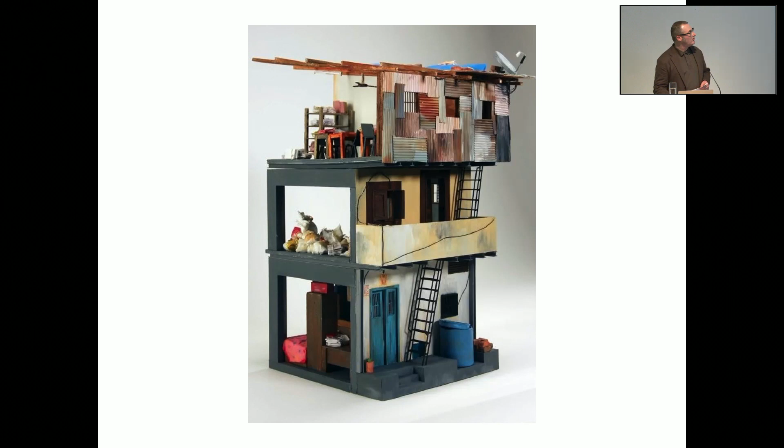So I'm going to talk about an idea behind the course, an idea that we try to impart to the students, which is the idea that all buildings have value, as do all people.

So while in practice, I almost exclusively worked on existing buildings. I came from Canada in 1996 and started working in the UK. And I think coming from a country which really has no historic built fabric at all, and what it does have, it doesn't tend to respect very well - it was really special for me to work in existing buildings.

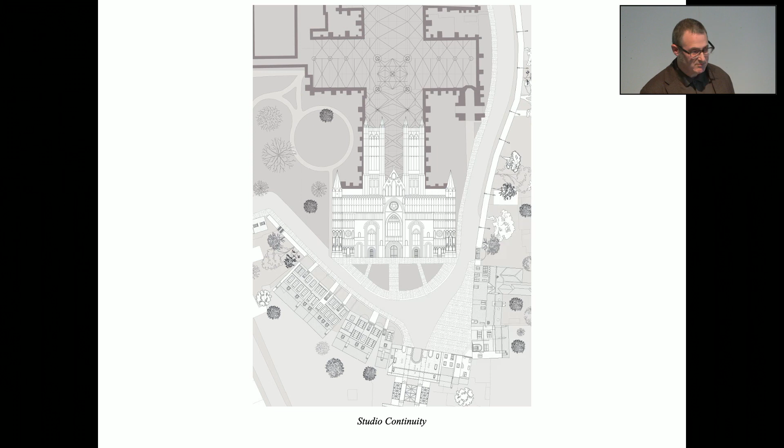Studio Continuity proposes a methodology, which I call looking at oldness, a methodology for working in existing buildings with understanding and appreciation in order to maximize their poetic potential.

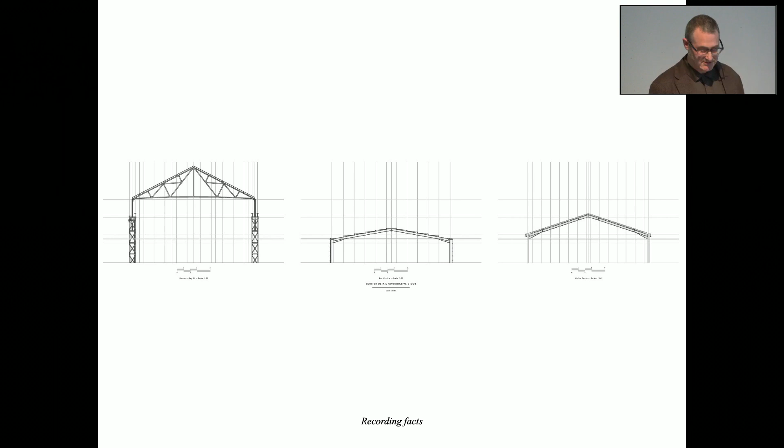The first step is recording facts. It's about documenting without preconceived notions. Judgment is suspended. It's about observation.

The second step I call seeing history. It's about understanding the cultural context that has shaped the original building and subsequent changes. Understanding what the architect or the owner, the builder, all the different contributors thought, and why things happened the way that they did.

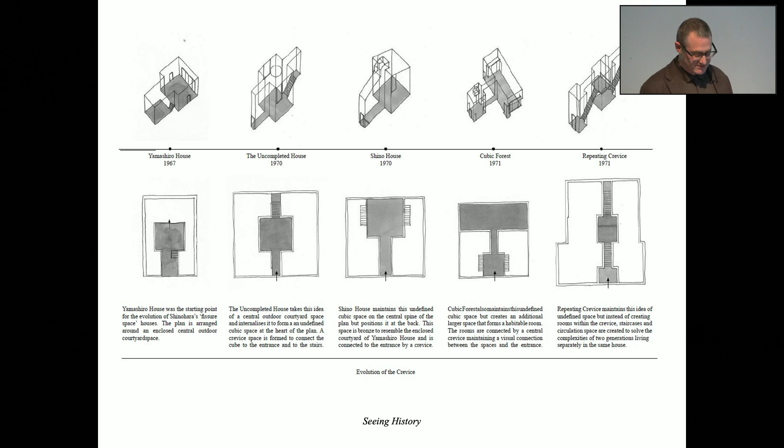The third step is conveying emotion. This is about expressing and documenting the emotional content in the existing building. This is the most important of all three steps. I think when you work on an existing building, you want to work with and enhance, in particular, the emotional qualities of a building.

Then I call it the assessment of significance. Of course, it's not an assessment of significance like in conservation, but it's about drawing up a set of design priorities. It's about making judgments and coming to conclusions - comparing, contrasting, analyzing and synthesizing the three previous steps. Then, so that when you move forward, you do so with a sense of - this morning people talked about how important it is to understand and appreciate what's there to shape those kinds of decisions that you need to make.

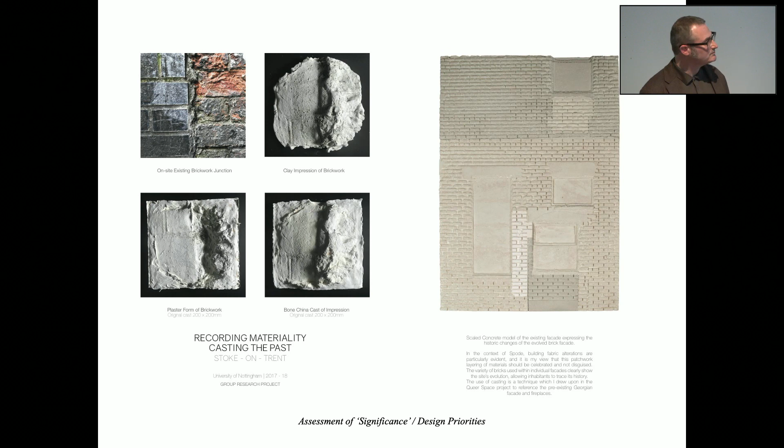So I'm going to show you some examples of some, very quickly, different student projects.

So when you see all buildings as having value, and you see buildings as a resource, then the first step is to keep everything unless there is a good reason not to - a kind of a near zero demolition approach. Stephen was talking about that in the discussion this morning.

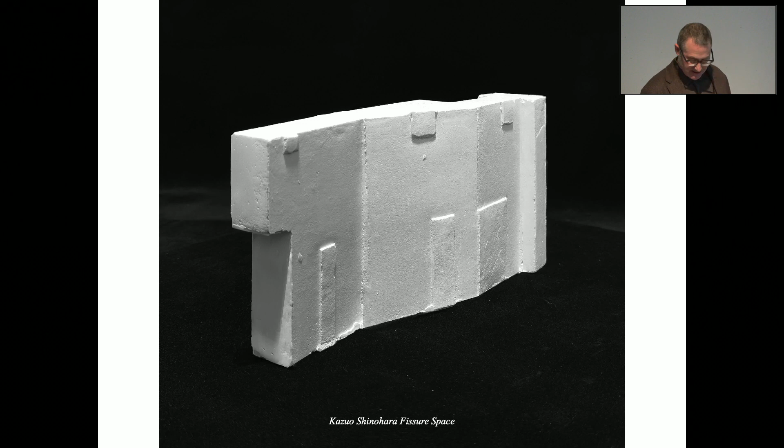So what do we got here? This is a study we did of Kazuo Shinohara during lockdown. So we went to Japan virtually - that was really fun. We had a friend of mine there, and he took us on a tour of one of the Shinohara houses, like on his phone. It was almost as good as being there, but it was a good thing to do during lockdown.

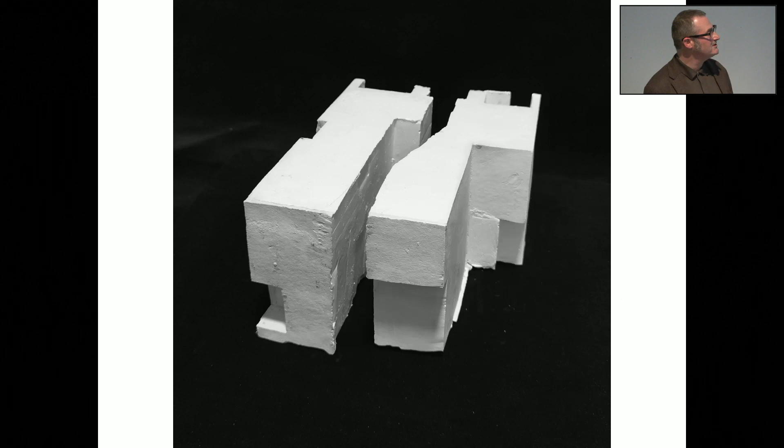And it meant I could take my studio globally, because obviously if your studio is really about visiting buildings, you're kind of limited how far you can take people. So this is a plaster model of the Shinohara fissure space as a solid, and then as a void.

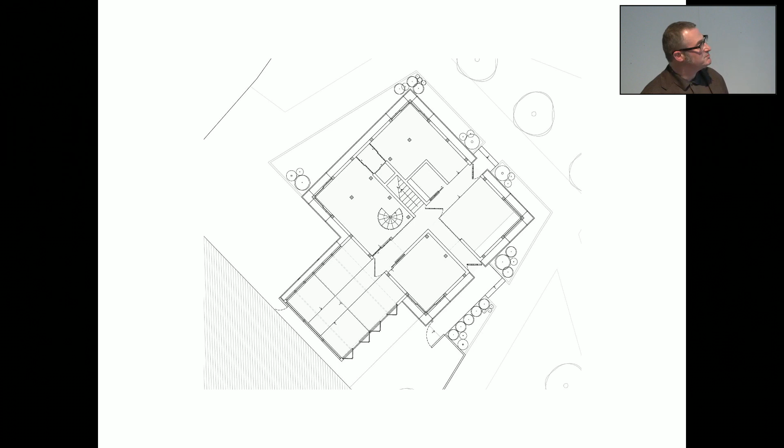Then they translated the ideas from Japan to a UK context. So this is the Eagle Building in Nottingham, which is now demolished. They applied the concept of fissure to the Eagle Building - that's the proposed plan and the existing plan.

Add, don't subtract - another approach, very similar. This is Burroughs Court in Sneinton, Nottingham. It's not the most beautiful building, though it has now been refurbished. Still not that beautiful.

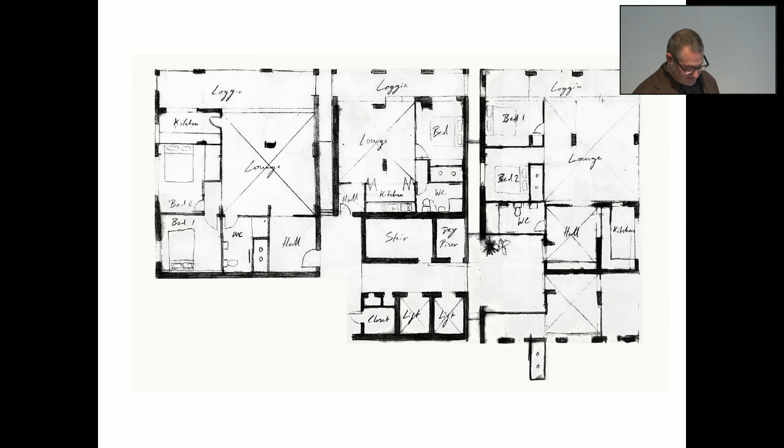And yeah, it wasn't in the best of condition. So Ryder was influenced by Peter Märkli's Apartments in Sargans, taking some of the ideas that Stephen was talking about. He was engaging with those ideas of no corridors, of making large, generous rooms and making a family of rooms. So that's the existing plan, and that's Ryder's proposal.

In order to do what he wanted to do, columns ended up in the middle of rooms. We thought this was something special, that actually a column in a room always makes different spaces within a space.

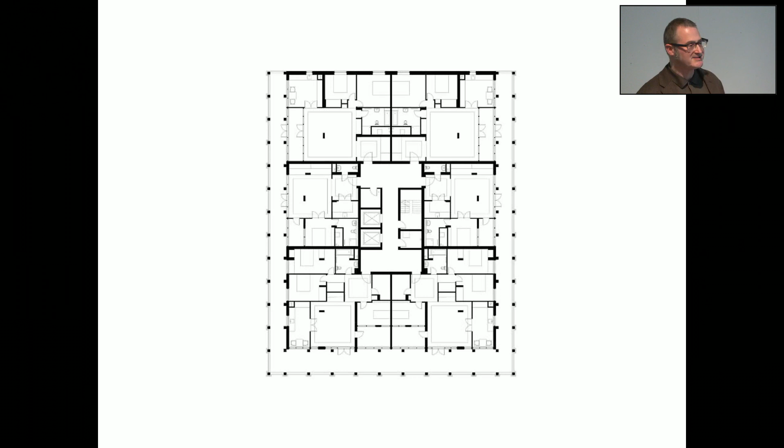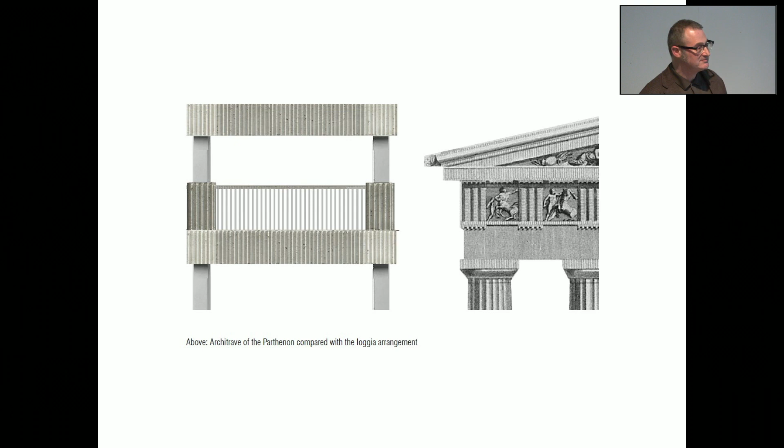And so we thought that was quite a nice thing. Yeah. So then he wrapped the building in a new facade, which pulled from the classical tradition to bring a new language to the building and unify it.

So the next idea is part 2 of the talk. All people have value. So at this point, you might expect me to speak about social justice, inclusivity, these kinds of things. But I'm not going to. I'm going to talk about the people that are connected to a building, the clients, the users, and the project team.

And in that list, I'd say the users are most important, but I'm going to probably talk more about the project team. So under the idea of the continuing life of a building, if you're having an approach that buildings have value, then they slowly change and transform through time.

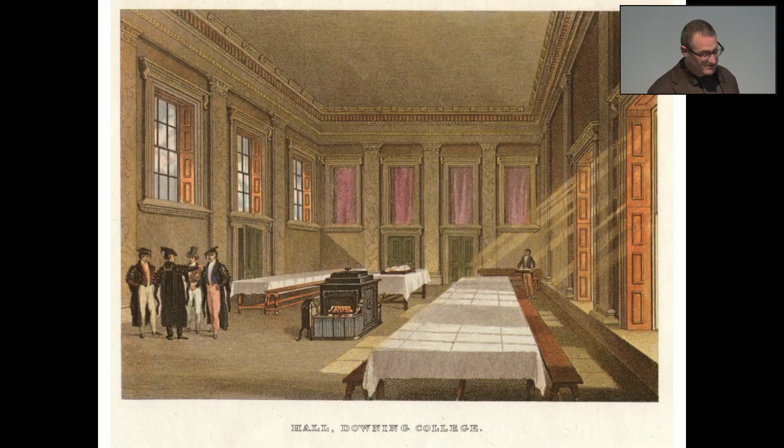So Downing College, designed and built by William Wilkins in 1821, remodeled by Barry in 1873, transformed by Howell, Killick, Partridge, and Amis in 1967, and again transformed by Caruso St. John in 2009.

By the way, I see this. I've always seen this project as a piece of theater. It's always how I've felt about it, which I guess you would classify as restoration under the kind of Ruskin thing.

Yeah, so there are many players in the life of a building, when a building has a continuing life. So architecture is not about architecture with a capital A. It's not about a single author. It's about a multiplicity of authors and participants, all who add value to the continuing life and evolving life of a building. It's a collaborative process.

And even just in one small project, there are a multitude of contributors. I don't think that's the whole list. So that's the list of clients, architect, all the consultants, contractors, subcontractors, etc.

So then taking that and translating it to a teaching framework, this idea of collaboration. We work with practice, all schools, I think, do. So working with practice, guest lecturers, guest tutors, critics, and researchers, honorary professors.

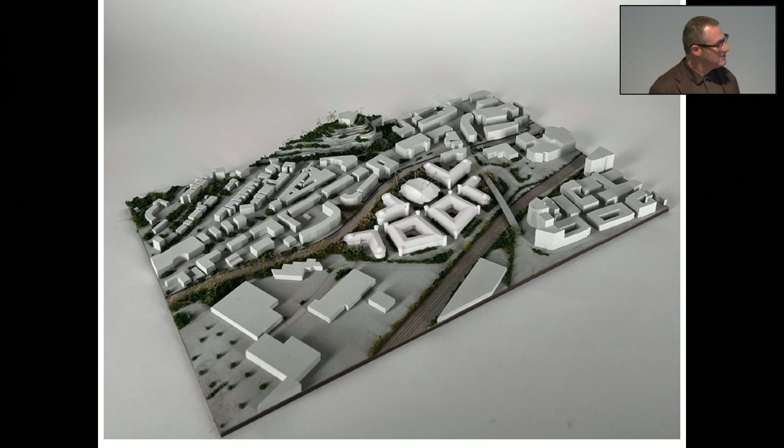And yeah, so I'll present a couple of examples. The first one is the Castle Meadow campus, which was formerly the Inland Revenue Center by Hopkins Architects. So the university has bought that and is changing it to a city campus. So the architects and engineers worked in a collaborative relationship, an exchange of ideas and work.

The way we've structured it is kind of like a design team. So the architecture and engineering students work together on a single project, but the engineers make a separate submission, and the architects make another separate submission. So they're working separately, but they meet regularly to share progress and ideas.

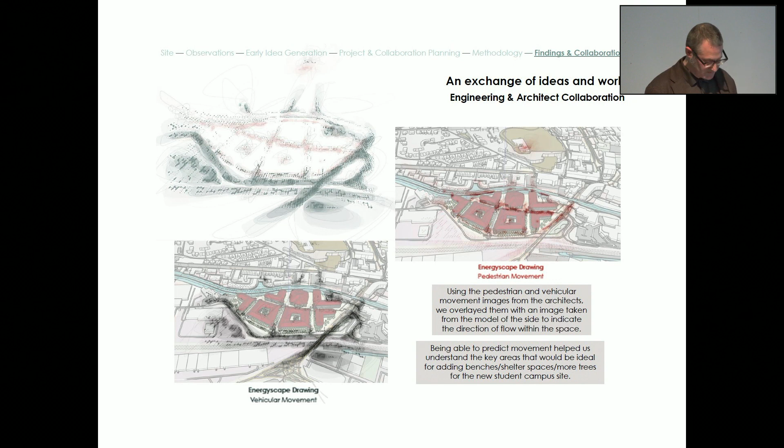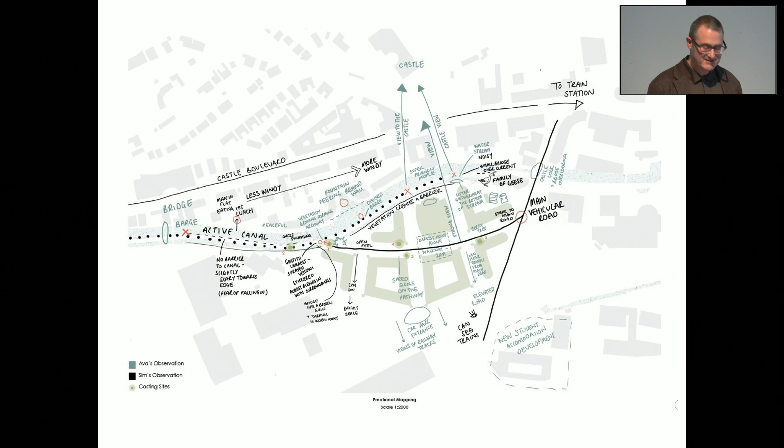And the work of the architecture students informs the engineers, and the work of the engineering students informs the architecture students. So, yeah, what have we got? So, Sim and Ava produced this site record drawing, which is loosely based on Julian's hairy drawings. And then the engineers take it and use it in their report to set the context for their project. The engineering students produce a wind simulation.

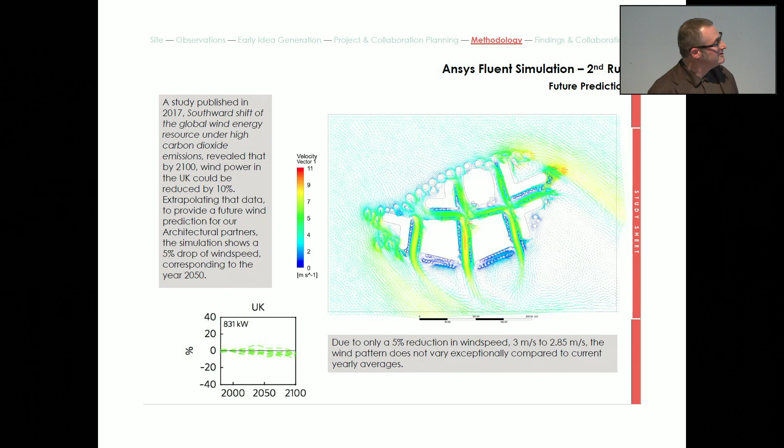The architects take the wind simulation, adopt it, and adapt it for their portfolio. I really like this sheet. I think they're almost like these beautiful paintings.

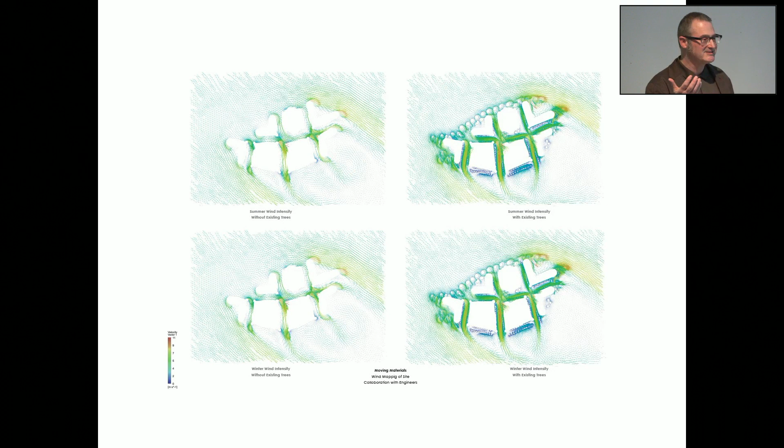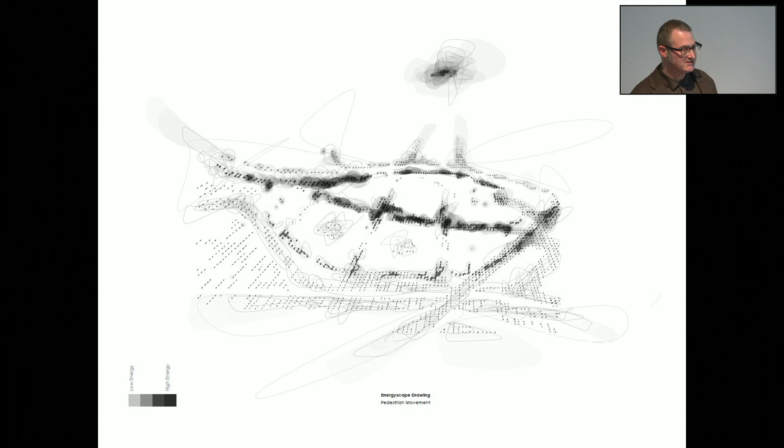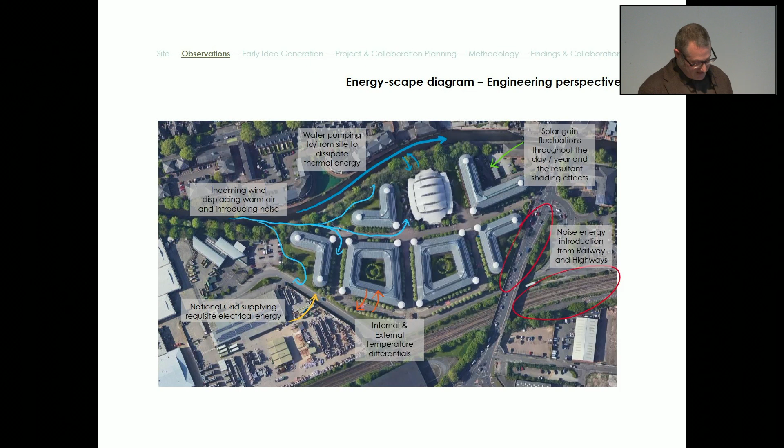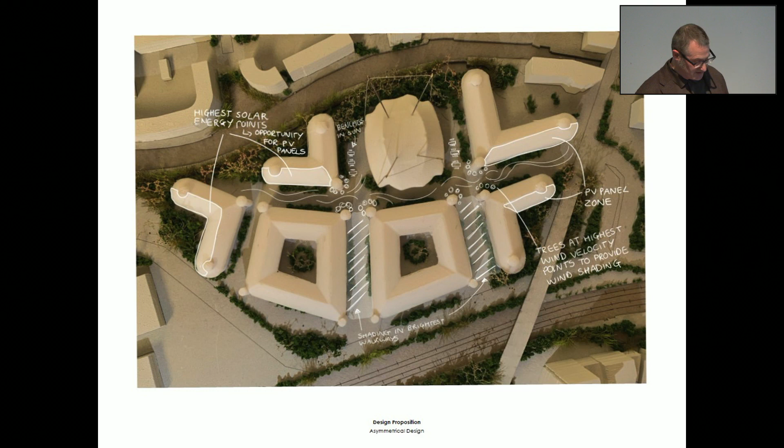The architects produce an energy-scape drawing. We were looking at the work of Hiroshi Sambuichi, a Japanese architect who has these ideas around energy-scapes. The engineers produce their version of an energy-scape drawing, reinterpreted by them. All of this comes together and informs the architecture students' design proposition.

Second example is People's College in Nottingham, an abandoned technical college from the 1960s. It's currently partially occupied by sixth form and partially occupied by asbestos, and it's probably going to get demolished, which is a real shame because it's quite a fine building.

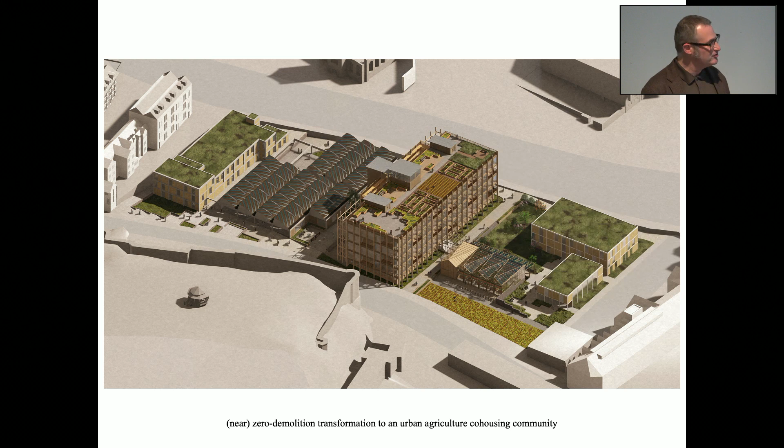So Nick's proposal is for a near zero demolition transformation into an urban agricultural co-housing community. Nick and Jocelyn were working together, sharing information, sharing drawings, calculating rainwater quantities, and being respectful of each other's disciplines.

To quote from Jocelyn's exchange here, they submit a collaboration document, and this was just one of the sheets from it. We just asked them to document a bit of how they're working together. But I just think this is really beautiful.

Jocelyn says, 'I have no architectural standards, but those images, in my humble opinion, are literally incredible and so clear, and are going to be so useful for the explanations within my report. So truly thank you for the time put into them.' I think it's about respect, isn't it?

Part 3: seeing value where there is none, on the periphery of Lincoln. This is a quick snapshot through our autumn project, thinking particularly about value. The project was actually framed more about post-carbon futures and peripheries.

This is a view over the Great Northern Terrace Industrial Park in Lincoln, where our study area is located. When we started the project, we wanted to do something on a periphery, taking on an area which doesn't really have much perceived architectural value, and see what we could do with it — back to the lowly Deluxe Decorator Centre on the periphery of Lincoln.

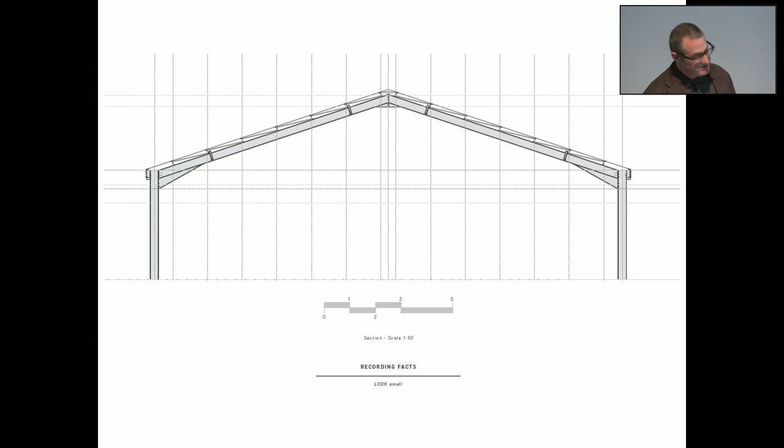The students worked in groups. I'll present a few examples; the engineers and architects were working together again, recording facts on the Deluxe Centre. This is a proposal for a new transport hub, a new timber structure inserted into the Deluxe Decorator Centre and connected to the city.

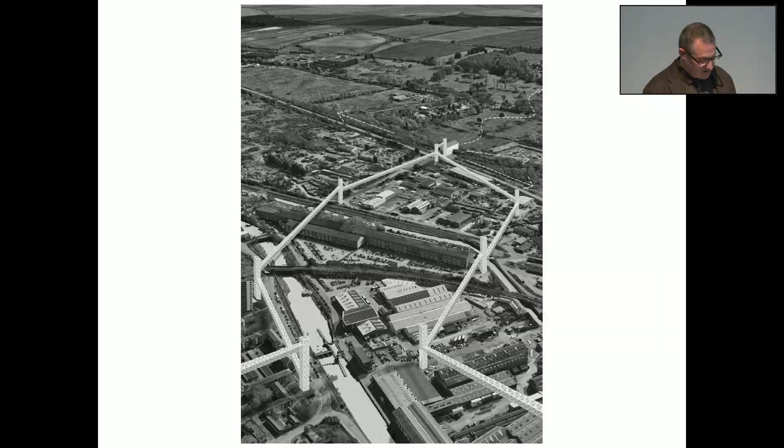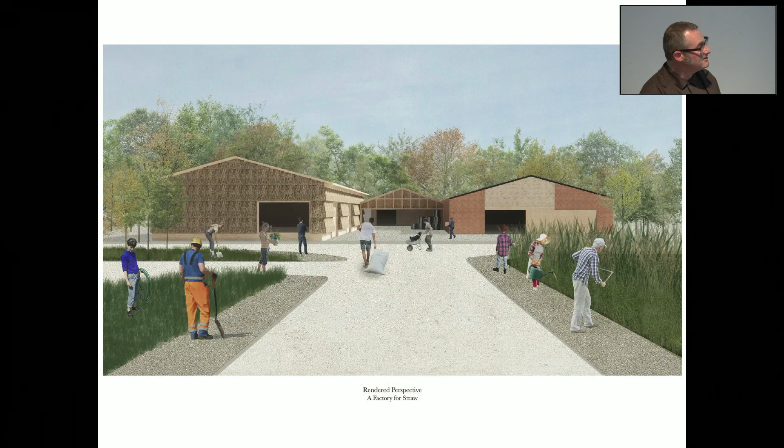A new factory for straw construction products, assessed by the engineering students — that's the Deluxe Centre there, assessed by the engineering students. And it's asking questions which makes them start to think really kind of big scale.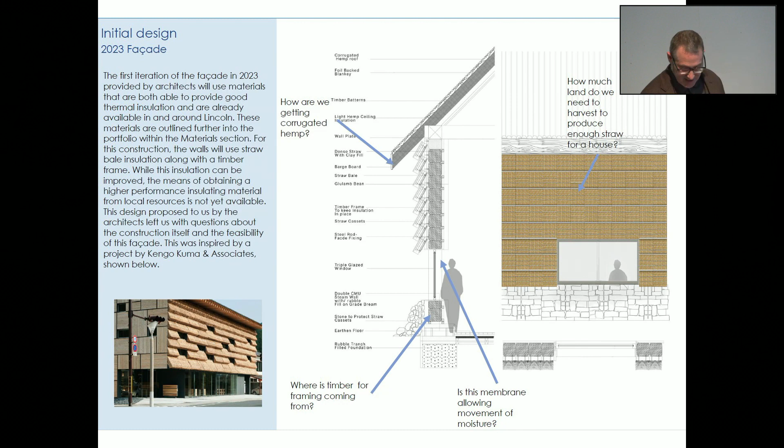Then they looked at land — the engineering students looked at land use. In turn, the architects thought at a wider scale and made a proposition for a post-carbon material belt which would wrap around Lincoln, addressing the periphery condition around the city.

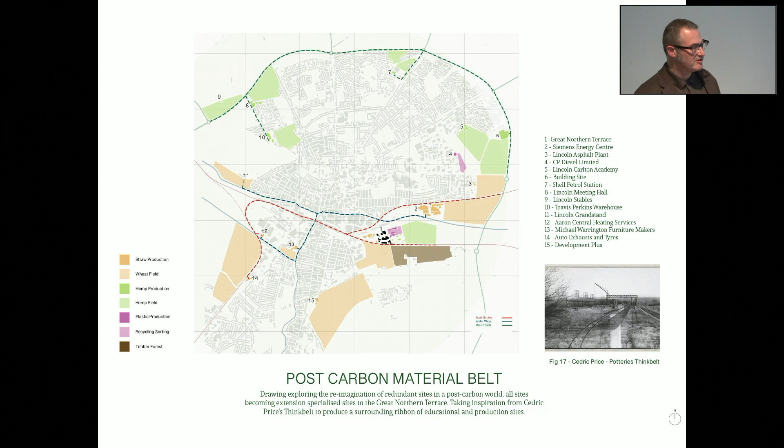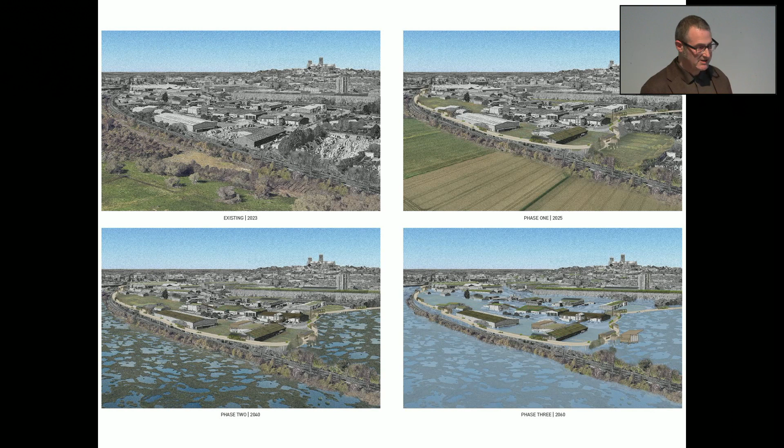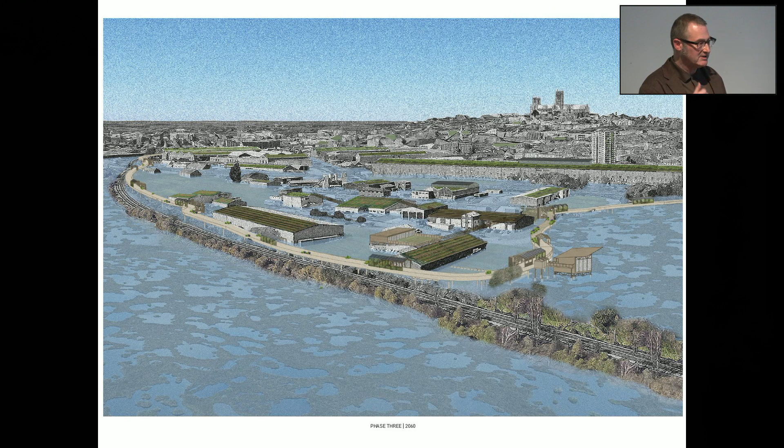This project was an investigation into the potential that future flooding holds. The river valley in Lincoln is projected to flood by 2060 from rising sea levels, and students were thinking about how this could actually be something to engage with — so it'd be intermittent flooding. They proposed an agricultural and growing community.

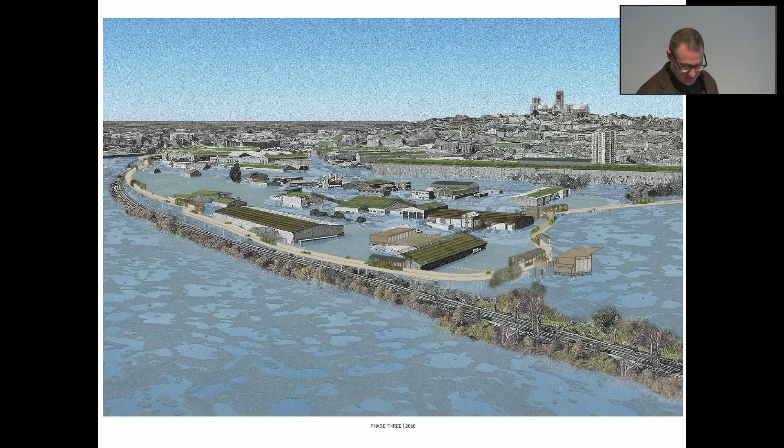There's the Deluxe Centre — so they start to inhabit the roofs. In this project, the Deluxe Decorative Centre becomes Renewal Junction, bringing together reuse, recycling, education, markets, workshops, and agriculture, in a kind of fun project, obviously inspired by Archigram.

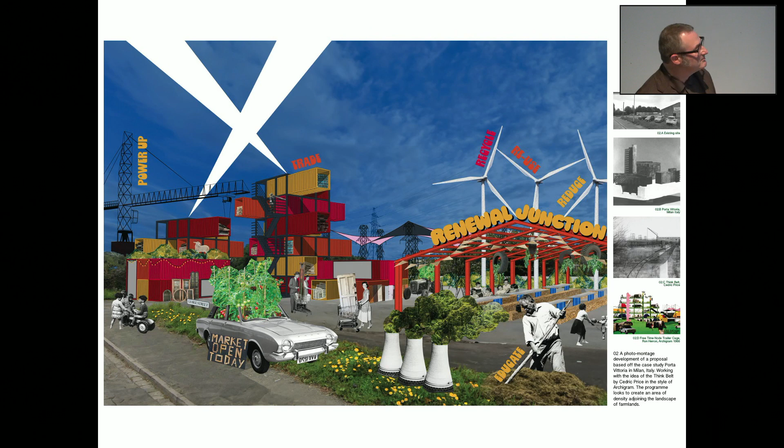A proposition, again, for the future. So in conclusion, all buildings have value, as all people have value. Buildings are a resource to be used wisely and with care, with appreciation, understanding, and feeling.